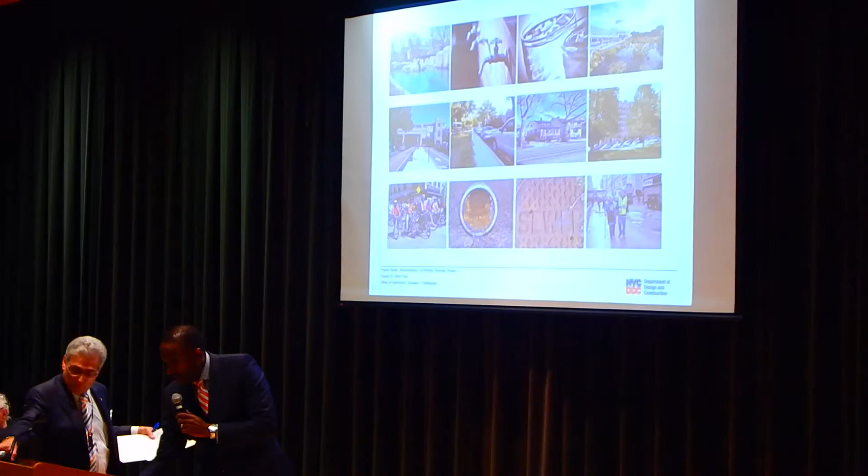Introduce yourself. Thank you. Good evening, everyone. My name is Thomas Alexander. I will be the Community Construction Liaison for the Reconstruction of Pelham Parkway Phase 2. I'm going to attempt to go through this presentation here, flipping through my notes while also flipping the slides. Welcome, everyone. Thank you for coming. Some candid shots of the Pelham Parkway area. And we're going to jump right in. Here's the agenda for the presentation.

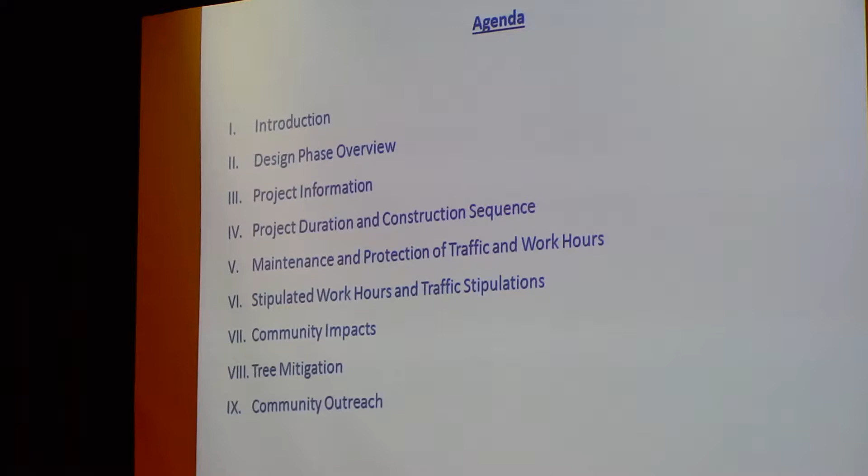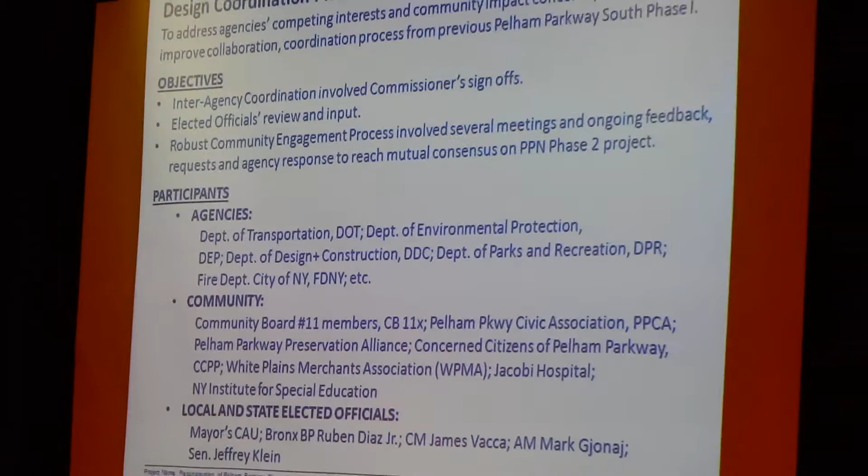Basically, we're going to get into the what, the when, and the where with respect to this project. You can see from the agenda, we're going to talk about the design phase next, and I'll go right into that. So this design coordination phase in this project lasted approximately a year. As John mentioned, there was a lot of input from the community. We also had a lot of input from the varying agencies that are involved in the project.

The design coordination phase was used to address the agencies' competing interests, as well as to address community impact concerns, as well as to improve collaboration from all of those parties with respect to this project, using lessons that we learned from Pelham Parkway Phase 1. The objectives of the design phase, like I said, were to make sure that there was interagency coordination and sign-off from the commissioners of those agencies.

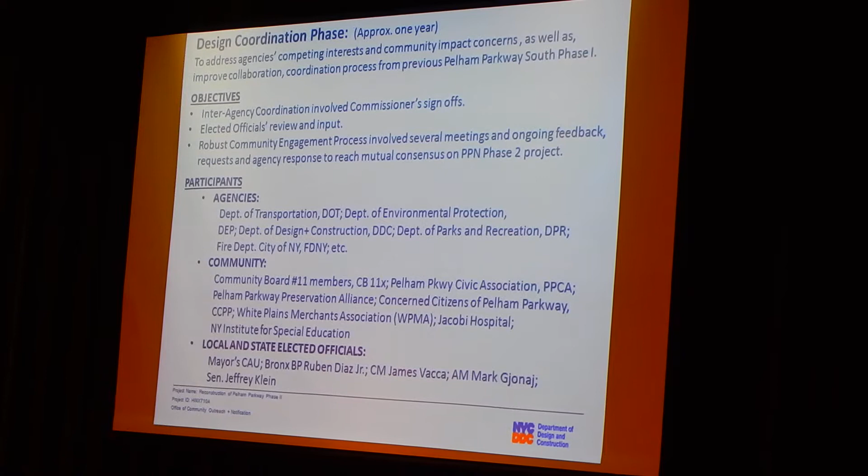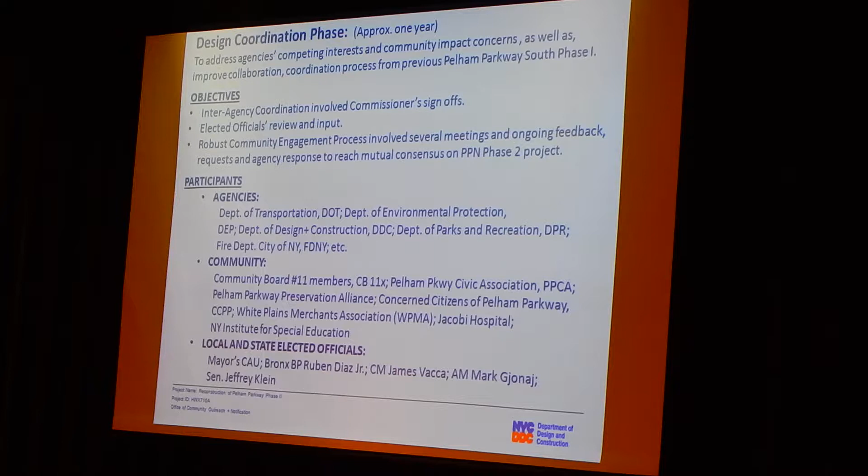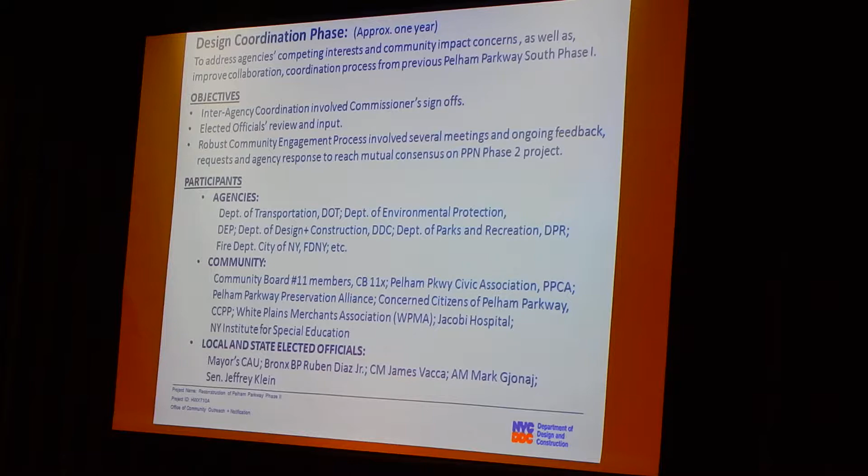There was elected official review and input, and as I mentioned previously, there was a robust community engagement process whereby the community was involved in the design process of this project. Below you have listed additional participants that were part of that process, just to give you an idea of everyone that was involved in developing the project prior to us all being here tonight.

So, a little jumpy. Okay, project information. That's just a snapshot of what we're about to get into. This is going to talk about the where and the when. Okay, here's your project map. And we have our project locations.

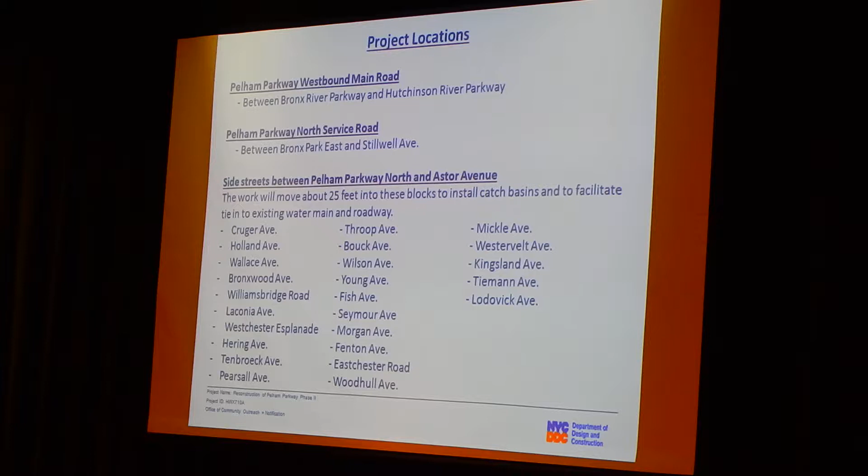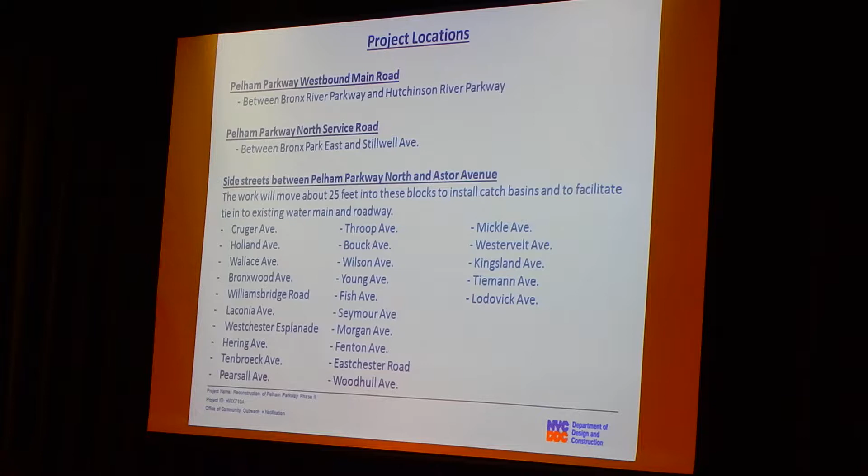So on the Pelham Parkway westbound main road, that work is going to occur between Bronx River Parkway and Hutchinson River Parkway. Also on the Pelham Parkway North Service Road, that work will occur between Bronx Park East and Stillwell Avenue. Listed also are side streets that will be touched as a result of this project. In most cases, the work done on the side streets will be to facilitate tie-in of the water mains or tie-in of the roadway work that is going to occur on the north service road.

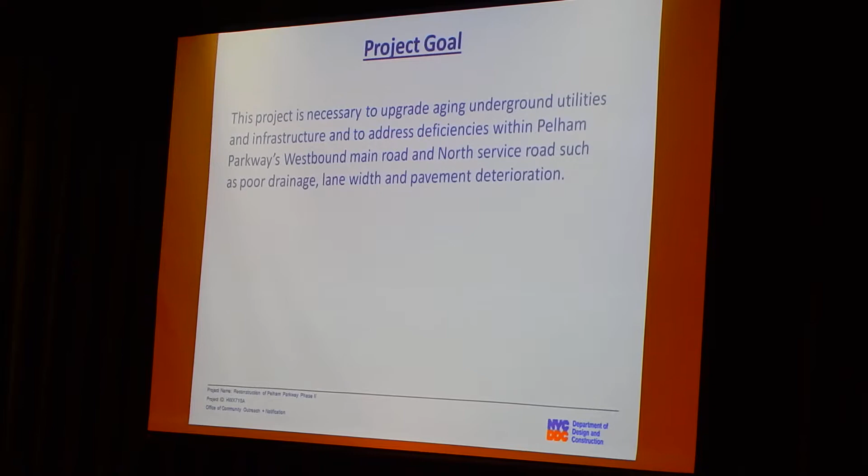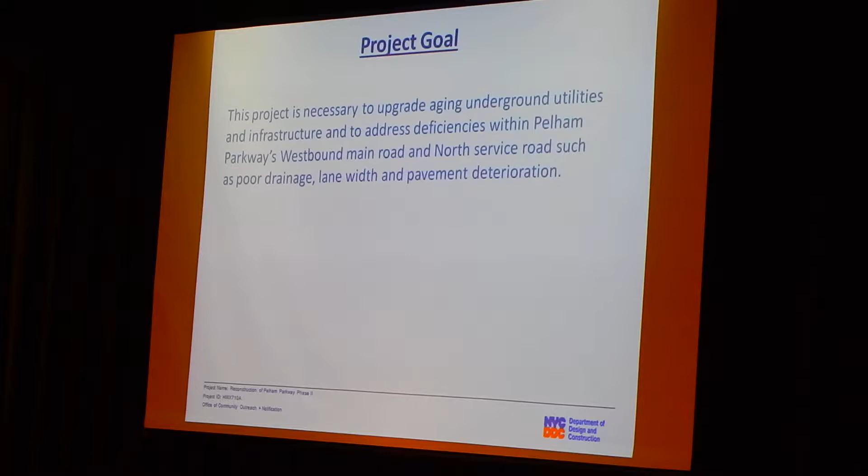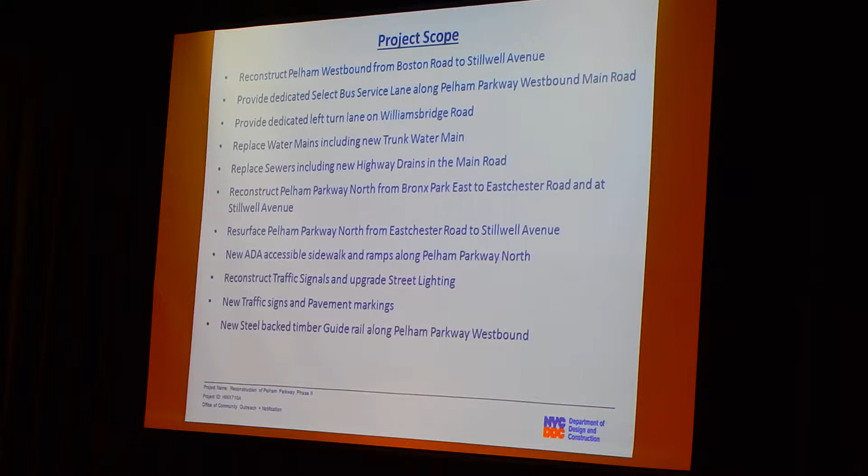The goal of this project is to upgrade aging underground utilities and infrastructure and to address deficiencies within Pelham Parkway's westbound Main Road and North Service Road, such as poor drainage, lane width, and pavement deterioration. The project scope. So this is where the money's going. This is all the work that is going to happen on this project. Now, for the sake of time, I'm not going to read each of these, because within the subsequent slides, I will touch on what's happening place to place within the project.

Okay, for every project, before construction work can occur, there is preliminary work that has to happen. So while you don't see any construction happening at the moment, there is work that is occurring to get the project up and running.

So far what's happened is we have opened the field office at 1200 Waters Place, Suite 312. The community construction liaison begins outreach activity. This is the beginning of my outreach. Hello everyone, you will be seeing me in the neighborhood from this day forward, getting to know everybody and developing my neighborhood notification listing that I'll use to keep you all informed moving forward.

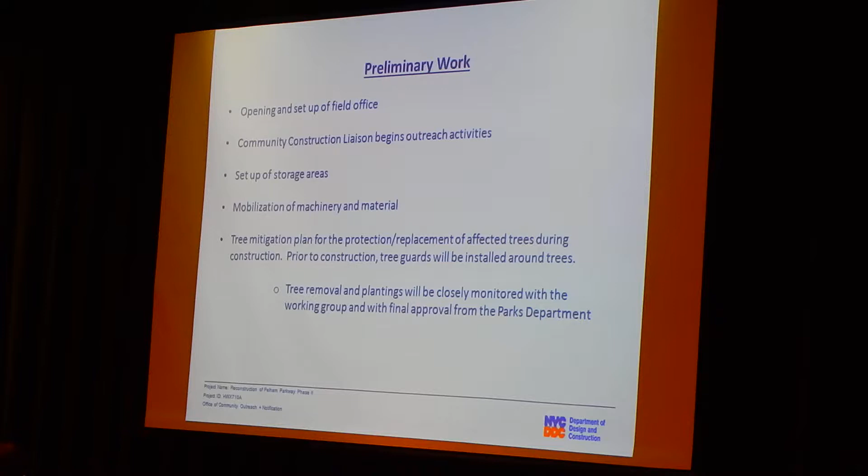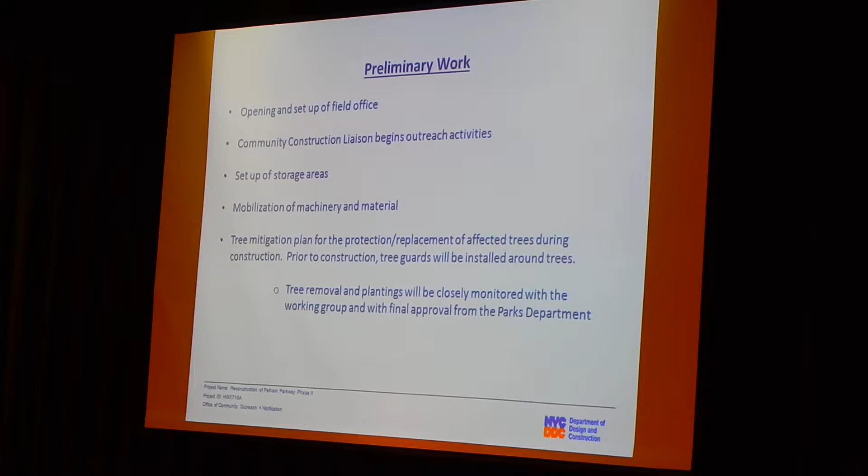We will be setting up the storage area, and the contractor will begin mobilization of machinery and material. The tree mitigation plan will be in effect. One of the first things you'll see is tree pruning, followed by installation of tree guards around the trees that are out there. As mentioned earlier, on a project of this nature there will be tree removal, and we're working closely with the working group to mitigate the removal of trees as much as possible.

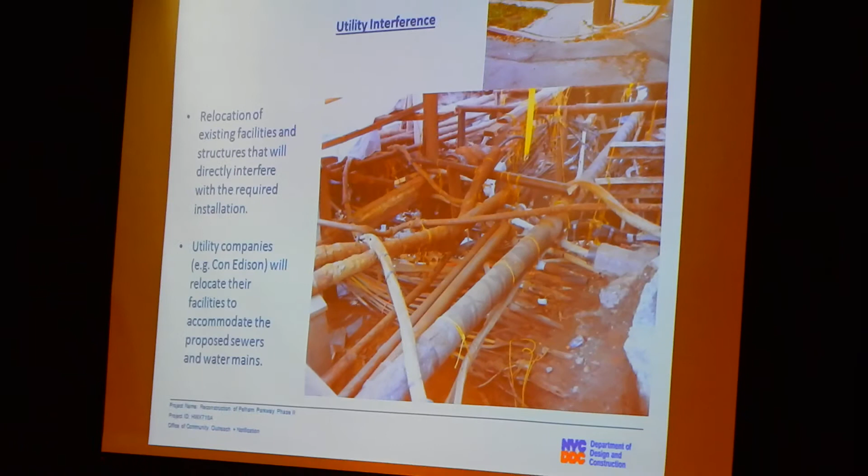Okay, utility interference. That's a picture of an extreme case, but it shows the kind of interference that can appear underground. Before we can perform construction work, that utility interference will need to be addressed. These facilities will need to be relocated in some cases, and utility companies will relocate those facilities to accommodate the proposed installation of water mains and sewer.

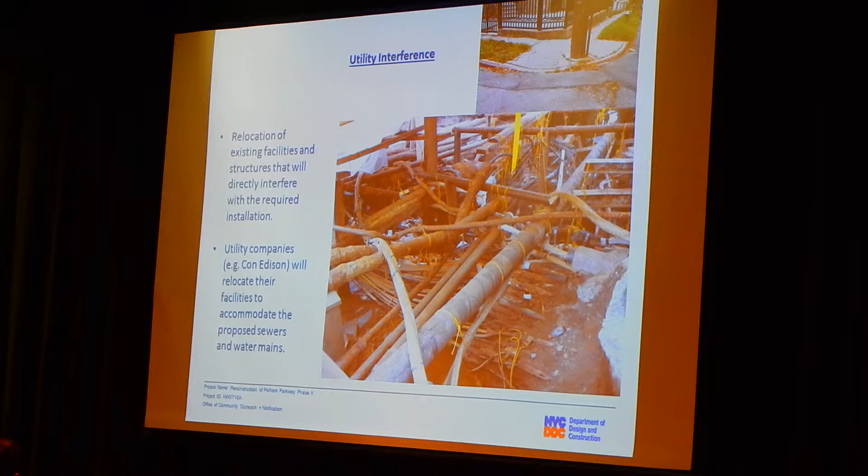As I mentioned, relocation of the gas main. There's approximately 10,000 linear feet of gas main that will need to be relocated on Pelham Parkway North between Boston Road and Stillwell Avenue before installation of the trunk main can occur. There's a trunk main that I'll get into a little bit that's going to be installed on the North Service Road. There's also a transmission gas main that will need to be relocated at the corner of Pelham Parkway North and Bronxwood Avenue.

Okay, project duration. Bear with me for one moment, please. Project duration, construction sequence, so project schedule and work sequence. The anticipated project schedule is summer 2017 to summer 2021, approximately a 4-year project. The work is anticipated to occur eastbound to westbound, beginning near Stillwell and working towards White Plains. So you see the sequence has us working on the main road first, then we'll move over to the North Service Road.

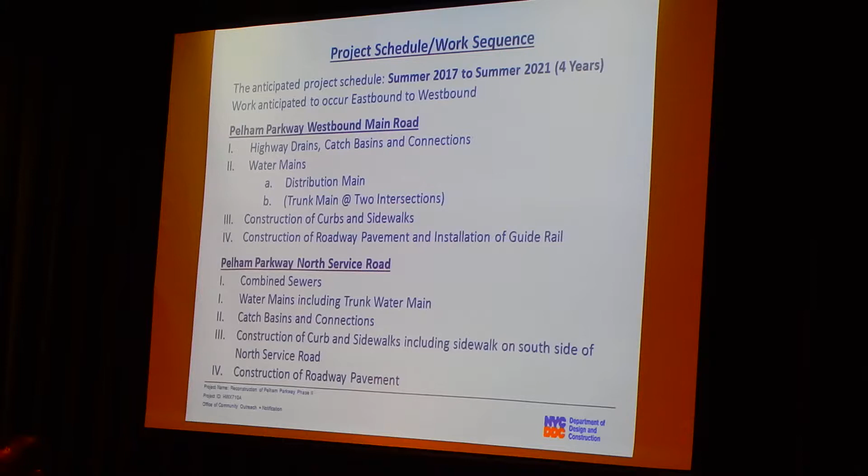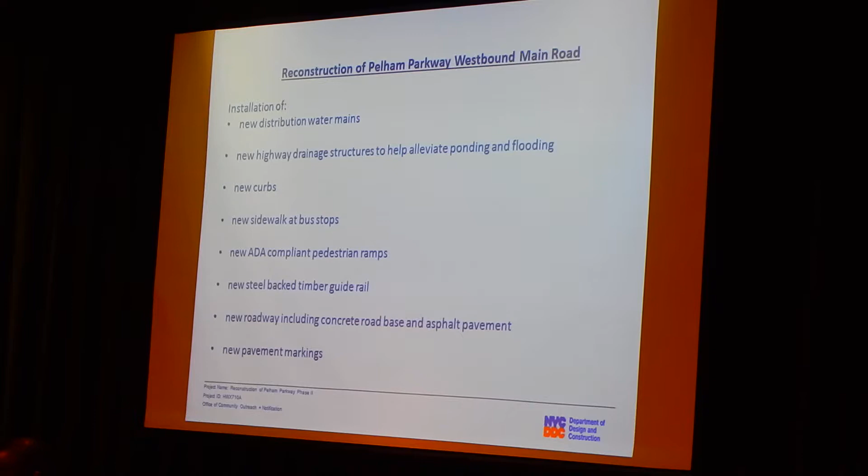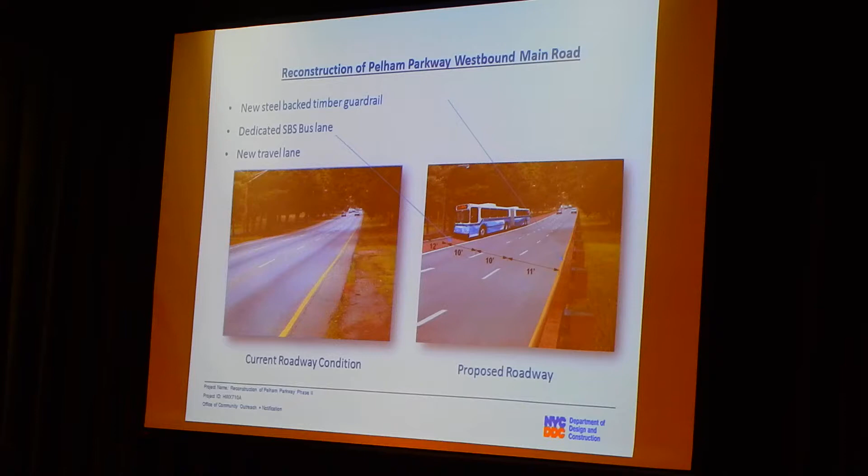Reconstruction of the Pelham Parkway westbound main road. We're going to be installing water main, new highway drainage structures, new curbs, new sidewalk at bus stops, ADA compliant pedestrian ramps, and a steel-backed timber guide rail running the length of the roadway. There will be new roadway including concrete road base and asphalt pavement, and new pavement markings on the main road. Here's a rendering showing what the roadway currently looks like, and this is the proposed roadway that hopefully will look like that when we're done. We're also going to be installing an SBS bus lane, and there'll be an additional travel lane installed as well.

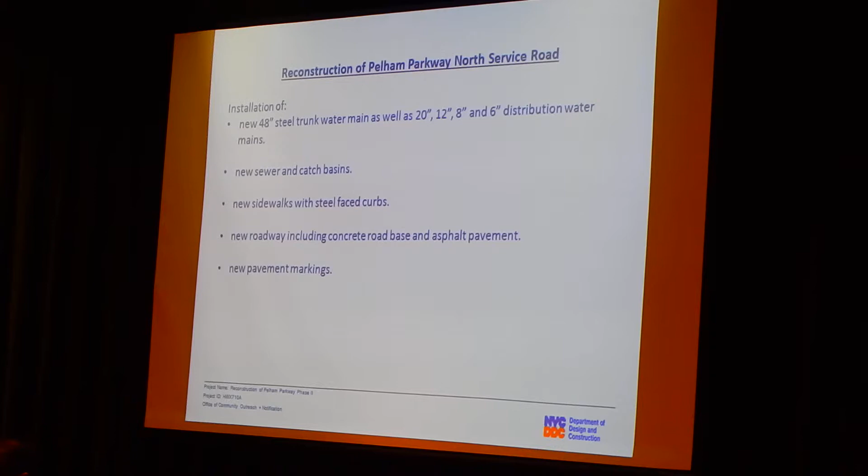The reconstruction of Pelham Parkway North Service Road. On the service road, we will be installing a 48-inch steel trunk main, a 4-foot diameter pipe going in on the roadway, as well as 20-inch, 12-inch, 8-inch, and 6-inch distribution water mains. We're going to be doing new sewer and catch basins and connections, new sidewalk with steel-faced curbs, new roadway including concrete road base and asphalt pavement, and new pavement markings as well. This is a shot of some trunk main work, file footage of trunk main work that has happened in the city, and you can see the pipes are large.

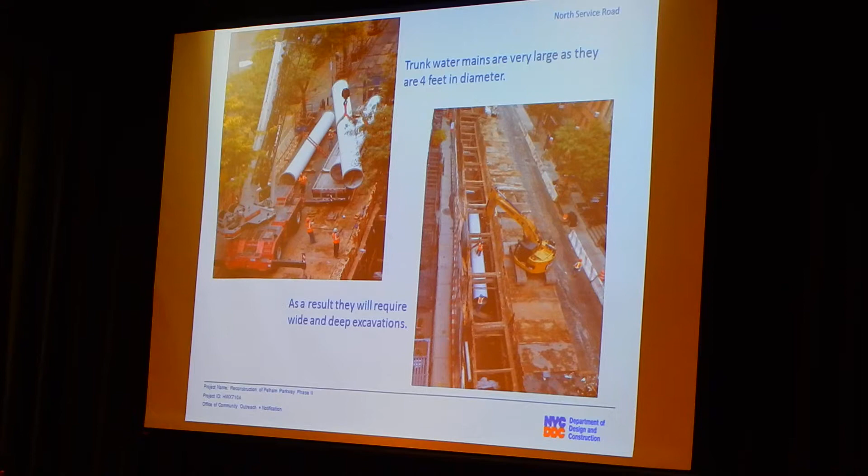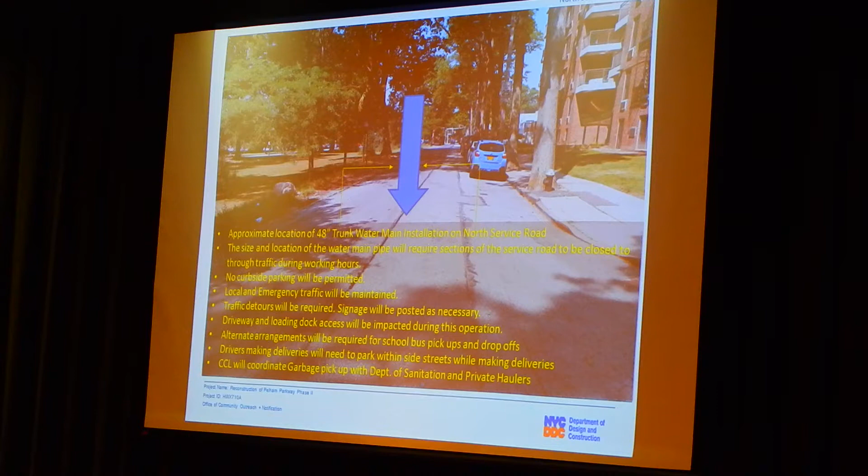As a result, you can expect that curbside parking will be impacted, and driveway access may be impacted. We will work with you to coordinate driveway access as this work is happening. Traffic detours may be required, okay. Alternate arrangements need to be made for school bus pickup, drop-off, and deliveries. That's why I'm here. I will work with all of you to coordinate those services, as well as garbage pickup.

We are going to be doing sections of 12, 15, and 18-inch combined sewer with catch basins on the North Service Road, with some work in the side streets. Kruger and Fish are two blocks where we're doing just sections of sewer installation within the blocks. Sewer typically requires deeper excavations, and the trench in some instances will need to remain open until that section of work is completed, so driveway access may be impacted.

We'll work with you to try and mitigate that as much as possible. Access to the North Service Road from some side streets may be temporarily restricted, and detours may be necessary as a result of this work.

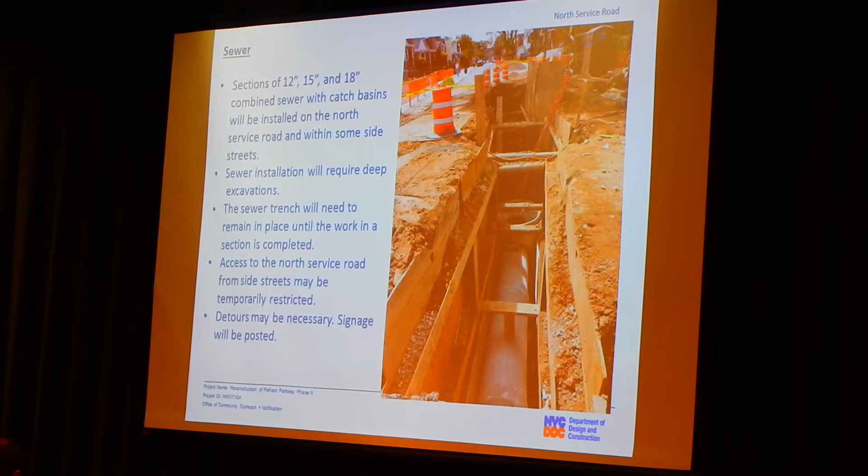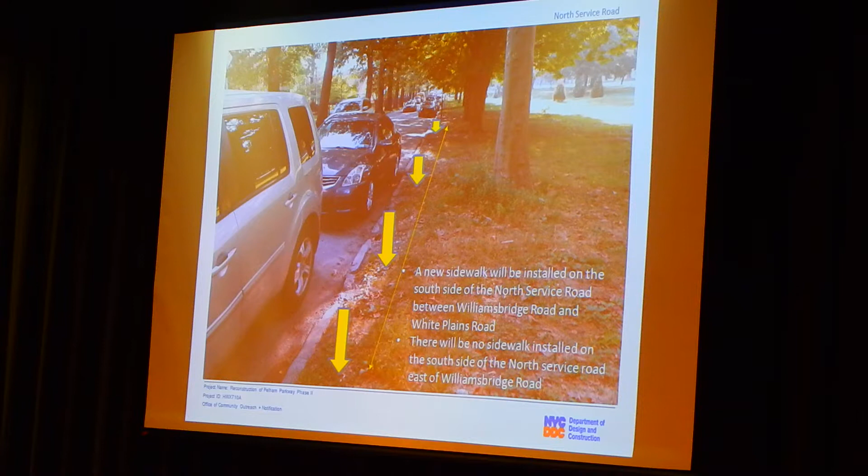On the south side of the North Service Road, between Williamsbridge Road and White Plains Road, there is going to be a section of sidewalk installed, on the south side of the North Service Road, from White Plains Road to Williamsbridge Road.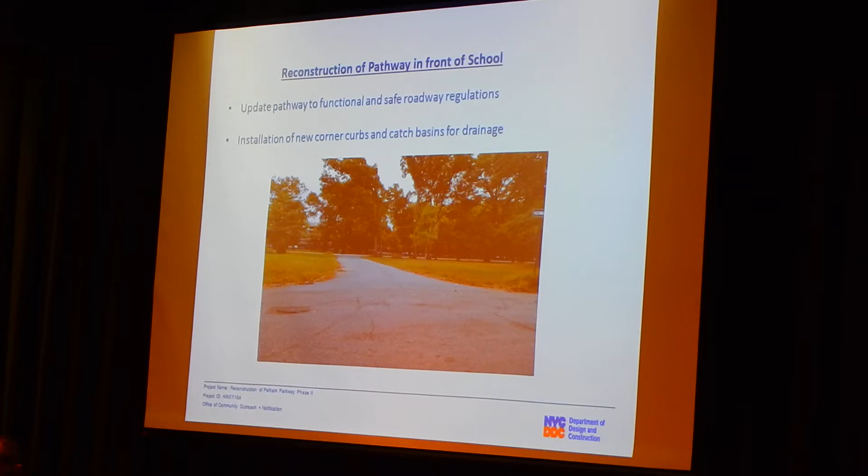The pathway right out front here is going to receive new corner curbs and catch basins for drainage, and we're going to update that pathway to make it functional and safe with regard to roadway regulations. We're going to be putting new roadway markings in there to make it functional.

Peace Plaza, this section here where Westchester, Esplanade, and Laconia meet. When we install the trunk main on the North Service Road, when we get to this intersection, the subway is underneath here. We will be installing a manifold on top of the subway roof to accommodate the water main that's being installed.

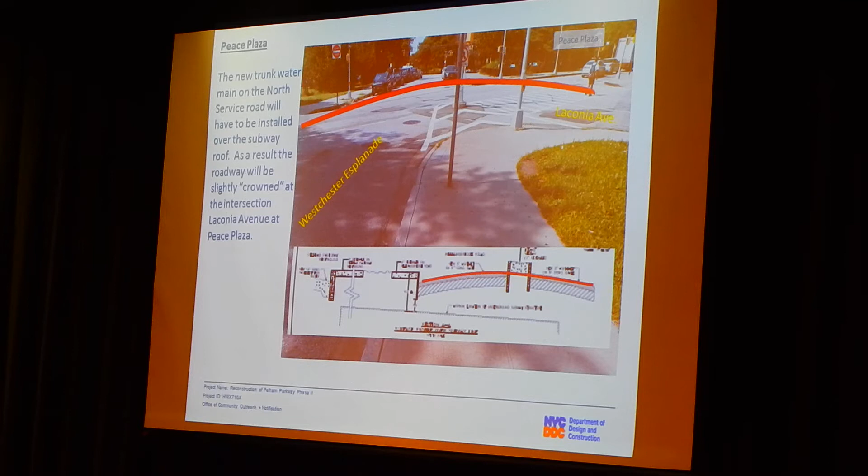The water main pipe is quite large, so large it would not be able to fit over the top of the subway roof without a significant hump in the roadway. So we're going to be installing a manifold which will break that larger pipe into 3 smaller pipes and bring it across that intersection. There will be a slight crowning effect in that intersection because of that manifold, just so you know.

Also at that area, as you can see on the diagram, there are going to be bump outs right here for pedestrian safety, pedestrian protection, and traffic calming. So at those 3 corners, the sidewalk will be bumped out.

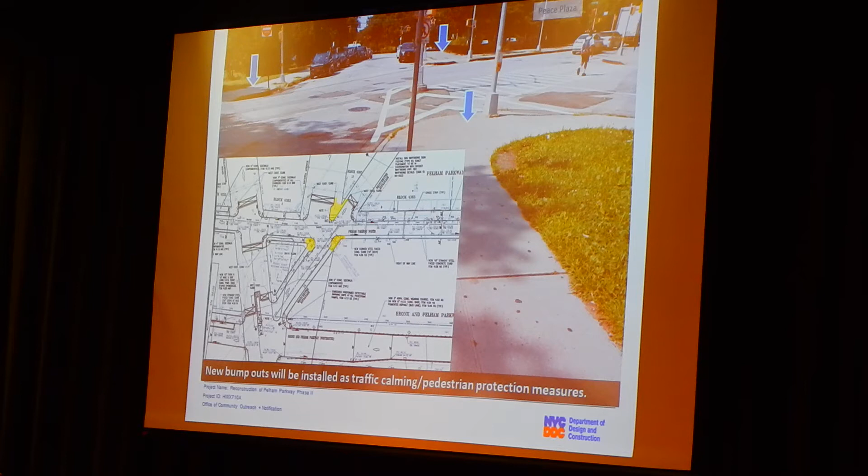Just to add a note, I was out there the other day, and at that top arrow right there, I actually saw why they were going to put this in, because cars do come flying through there. I saw a young lady standing there, and it made me realize why the bump out's there, because she almost got hit. So I think in this particular area, it is a necessary feature that's being put in.

Maintenance and protection of traffic, work hours, and traffic stipulations. As I mentioned earlier, there are going to be impacts to traffic. With respect to pedestrian access, there will be access to buildings at all times for pedestrians. Bus stops will need to be relocated while performing work on the main road. Work on the westbound main road and the North Service Road will not occur simultaneously, so our construction work will not happen simultaneously on the two roadways. Lane closures will occur on the main road; however, there will be two travel lanes maintained at all times.

Trunk water main sewer installation on the North Service Road will require a detour to Astor Avenue or Waring or any of the avenues north. Through traffic will be maintained when working across intersections. So when working across an intersection, if the work comes across, we'll plate one side to make sure that traffic can keep moving while we work in the intersection.

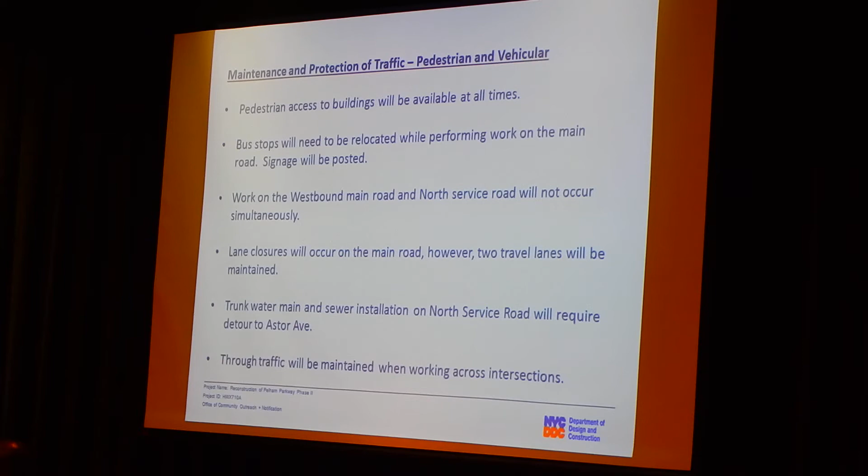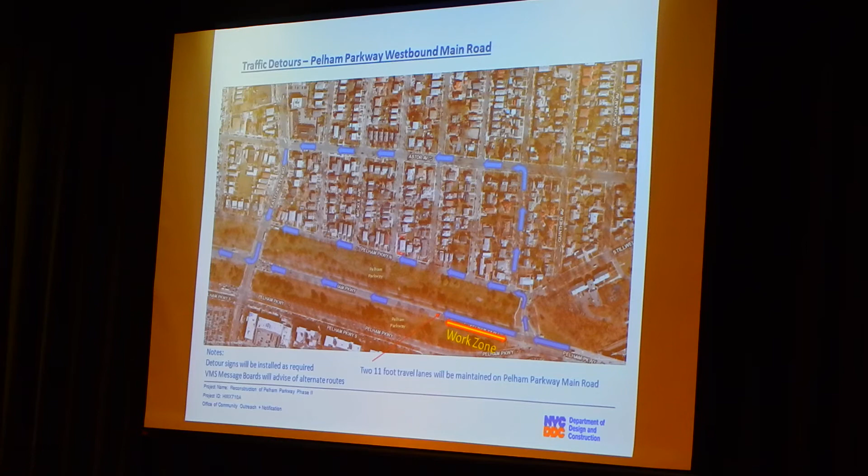This is an example of what a detour will look like if working in the main road. If the work zone happened to be right there, folks will be detoured. People who don't want to wait to go through the two travel lanes, that blue section right there, will be the two travel lanes continuing westbound. But if you don't want to wait and want to move around it, you can go up and around on the North Service Road, or further up and around to Astor Avenue, or continue further up if you'd like to. Detour and VMS boards will be put up to make people aware of these detours.

On the North Service Road, it's the same situation. We're working on the North Service Road, putting in that trunk water main, and traffic will be diverted up and around. We will only close those blocks necessary to be working, and traffic will be detoured only as necessary for those blocks. We're not going to take any more space than we need to.

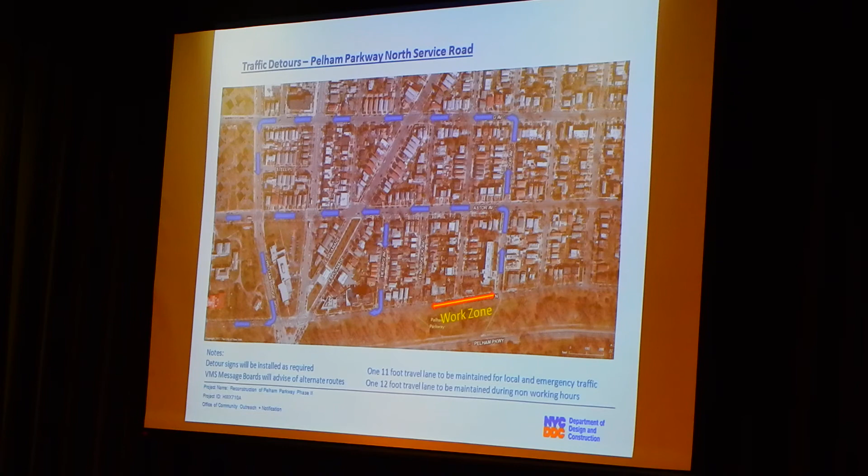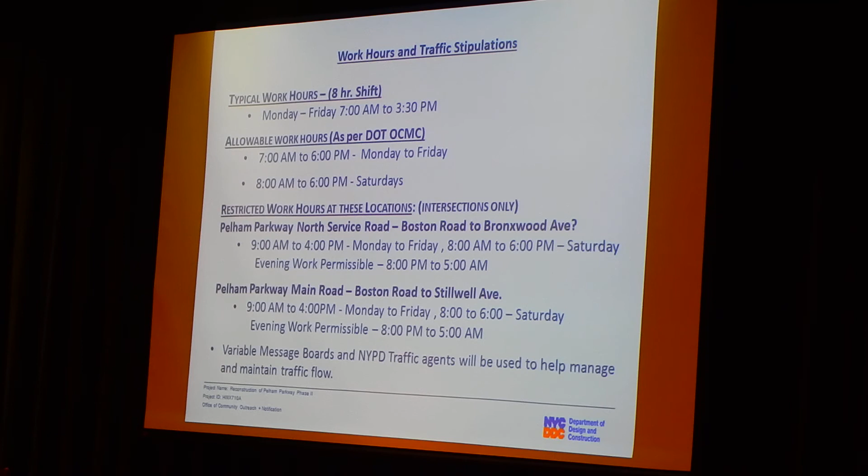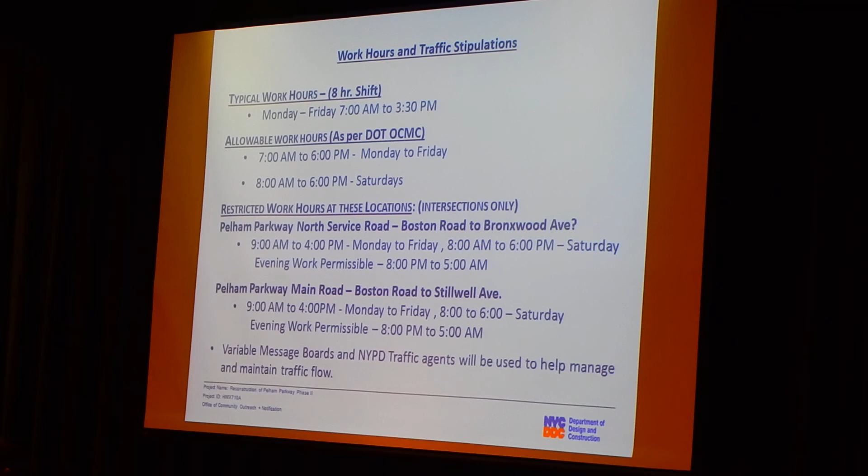Typical work hours are an 8-hour shift, Monday to Friday, 7 a.m. to 3:30 typically. There are work hours permitted from 7 a.m. to 6 p.m. Typically, when working on water main, work many times does end around 3:30 or 4 o'clock, but in some instances, water main work can run late and continue until up to 6 o'clock. That's why the allowable hours are there.